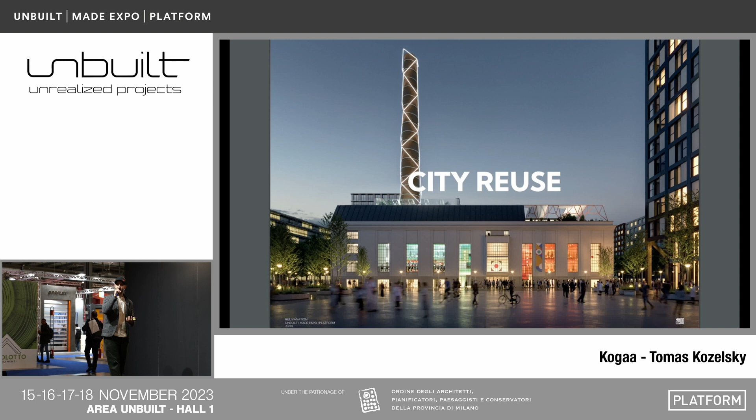Our main topic is city reuse. We started from adaptive reuse, taking worn out, hibernating old buildings and transforming them. But we grew bigger and bigger, and suddenly it's not just houses, it's the infrastructure, it's also pieces or quarters of the cities. We are basically expanding into the public space. So this is what we do.

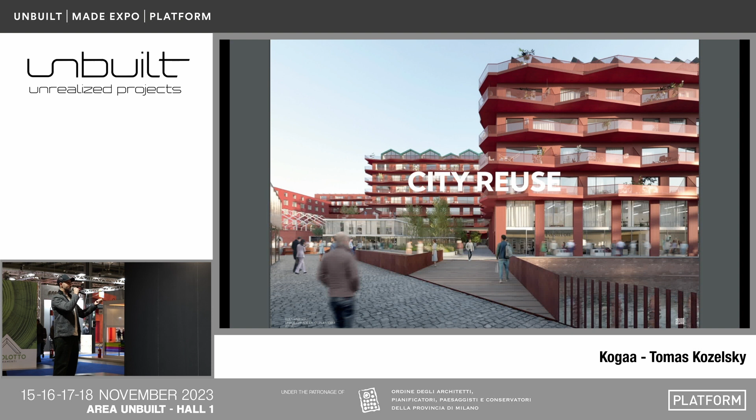Today I would like to tell you a little story about one building in Brno, the second biggest city in Czech Republic. It's a story about us finally growing into becoming a considered big architecture studio, because they allowed us to play with this proper historical heritage.

It's a building, a public spa by Bohuslav Fuchs, who was the biggest trailblazer of functionalism in Czech Republic. It all started in the 1920s, when there was a massive boom of the fashion industry in Brno. It was called the Moravian Manchester, or Central Europe's Manchester. There were plenty of companies producing textiles, and it was a period when a lot of people from villages started moving into the city.

For all these workers looking for work, they had to build houses. But at the time, the sewage system was not so developed. So all the houses built for these poor people moving into the city created a kind of micro-housing - basically classic houses with small apartments. The approach ran through a common balcony, shared with all the people living on the same floor. The only toilet they had was a shared one at the end of the balcony, and there were no showers, nothing like that.

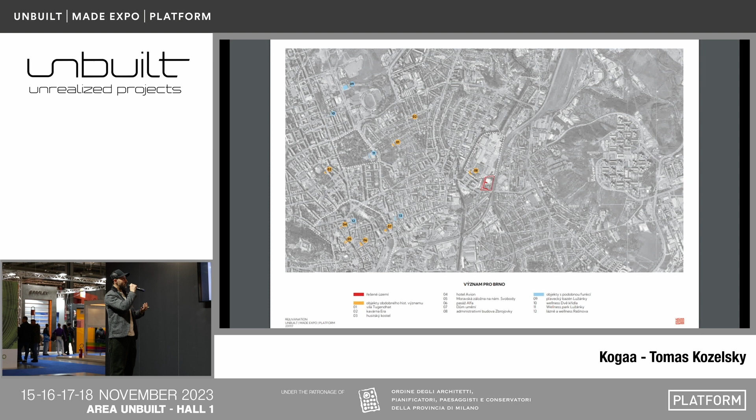The actual historical quality, something quite interesting about the spa, is the fact that it's a member of a streamline Art Deco style, even though it's functionalism.

Art Deco per se is about using curvatures, and it allows you to appear like a steamboat or a plane or something like that. But with functionalism, it's all about the right angles, and it's very difficult to create a volume or figure that gives you the feeling of a streamline.

Yet this building is the only nautical or streamline functionalist building that we have in the Czech Republic, so that puts a different level of heritage protection on it.

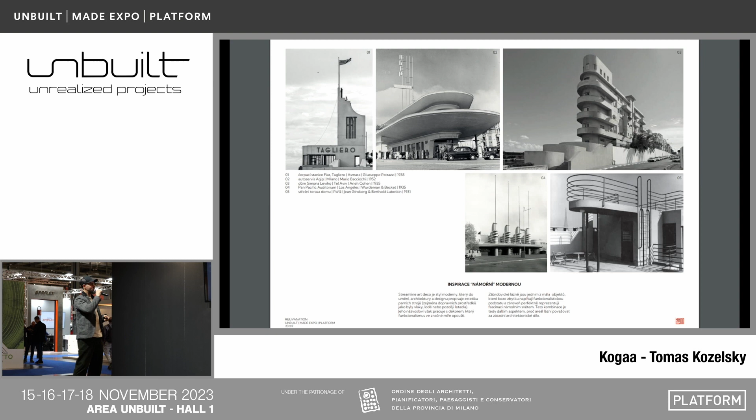But times are changing. This is how the building looked after the revolution. After the Second World War came the era of socialism, and the municipal spa turned into a social facility working for whatever was needed—there were parts used as hospitals. Every new user was kind of transforming it, so the first lobby you saw, nicely open with beautiful windows and greenery inside, turned into these kinds of hallways which give you creeps.

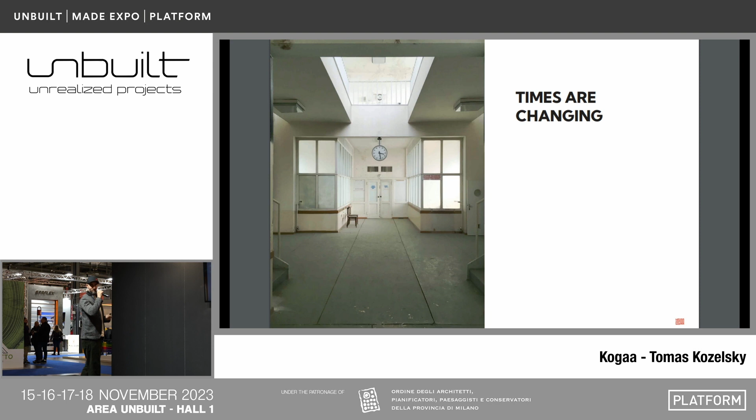This is always a comparison of the same areas, how it looks right now and how it looked in the original design. The original design was absolutely ingenious—it was a social building, representative, but still a social building.

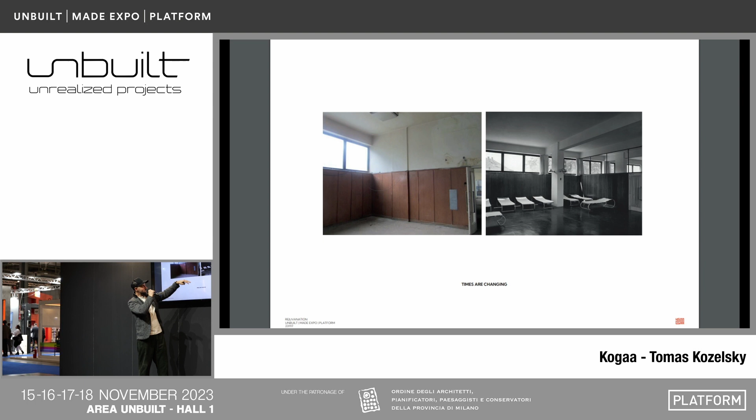What you can see is all these linear windows which are way too high to see outside, and partitions which also weren't reaching the ceilings. Why was that? Because at the time electrical installations were super expensive, and these were just for workers going to be washed there. So they used daylight to cover all the rooms inside, instead of separate ceilings they had one common ceiling.

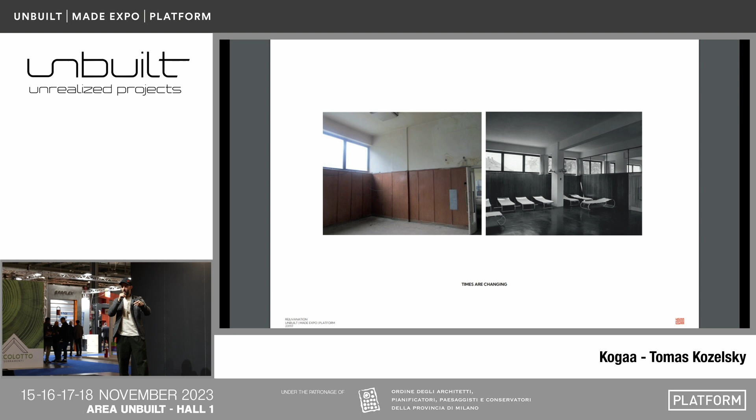At night they used a few spotlights shining into the ceiling, managing to light all these little rooms like the showers, so you didn't have to spend so much energy keeping the building running even at night. This is on the ground floor.

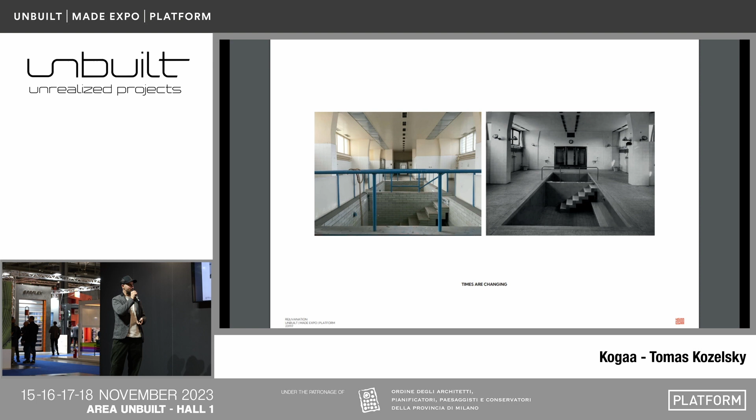We have these inbuilt pools which were used for massages. It seems like a small thing, but the fact that you have it on the ground floor, and heritage protection says you cannot do anything with these pools—they have to remain as they are—is a big issue for any possible usage of the building.

This is how you see advertising hit the main entrance towards the exterior pools. You don't see it much, but this beautiful glazing turned into very cheap glass bricks, which are now broken with dead pigeons lying inside—a very representative moment.

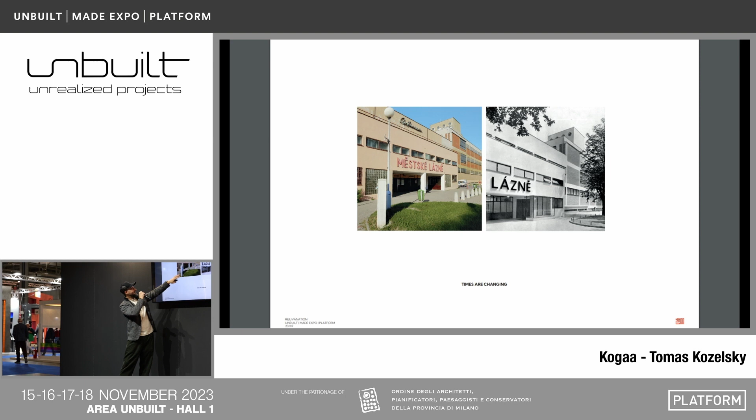Suddenly, from just a spa it became the city spa, and here you see it's decaying, and has been decaying for quite some time—this is the recent state. We were there not even a year ago, and as you can see, the ceilings are really falling apart, and the infrastructure is actually missing.

This is happening just because the owner is the city, and they're trying to change it. They've already had more than 20 projects for what to do with it, but every time a project lands on the table of heritage protection or monument care, they say no, we're not permitting it because you're destroying the building. So the building is actually decaying by itself.

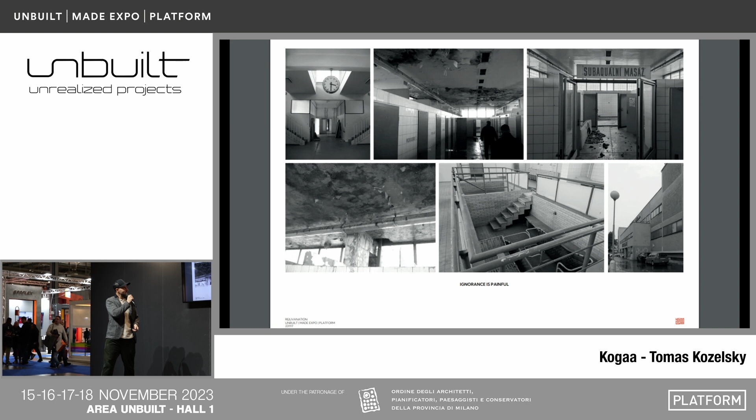So when we were addressed, we decided to have an approach that recovers the body of the building, but we realized the first thing we had to start with was recovering the soul—the original initial function of the building as it was.

So this is actually our proposal, which is basically the same thing as there was at the beginning. We did a stratigraphy check to find the original colors, because black and white photos only give you black and white, and we found there were much more colors inside the interior. So we started working on the rehabilitation of the building.

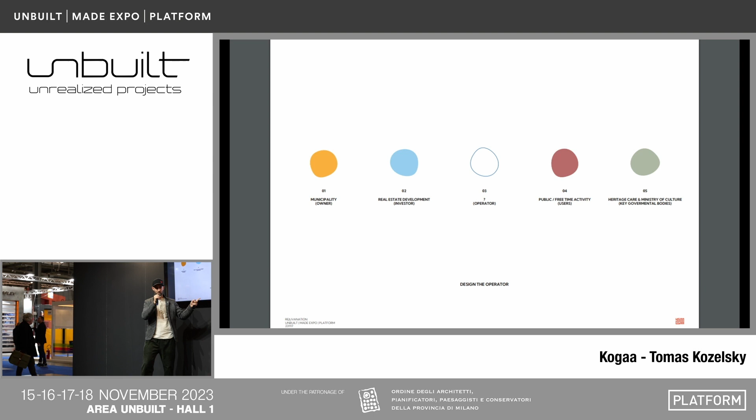What was really the essence of design in this project was the structure. We had the owner, which was a municipality, and we had an investor, the real estate developer, saying, guys, I cannot have this falling apart building right next to me. I'm willing to put as much money as you want into it to turn it into something, but I don't have, as a developer, the ability to run it. So you should look for some operator. That's the thing I cannot do.

Then we know from public opinion what people want the building to work as. They want to use it as a free time space. The city actually determined the plan of mobility within the city as this being a free time center, but actually it doesn't work at all.

And then we have the bad guys in brackets behind it, and that's the heritage care and heritage protection. We have two different departments: one is the big one, the country one, the Ministry of Culture, and the second one is the local one. So that was the situation we had, and everybody wanted something else.

The city, of course, focuses on the design of the city image. The investor wants to have a financial return through raising the exclusivity of the area. The public in general is focused on the extension of city amenities, and the monument restoration department is focused on monument restoration and cultural gains.

So these were all the things we had to put on the head of the operator, and we started traveling the city and the country, and in the end we actually managed to attract a chain which does good wellness. They were like, hey, the area is pretty good, we don't know if we fit inside the building. And there start the negotiations on the rent, on the conditions, on the support, if everybody is willing to contemplate having a spa there.

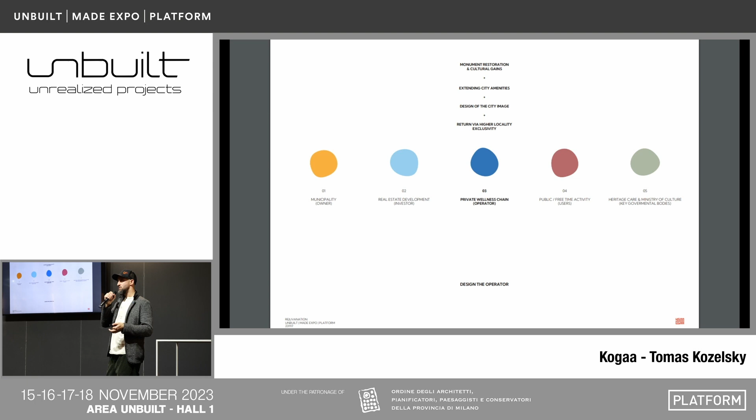In the end, we actually managed to bring all five actors together and present the project. So how we actually managed to convince the most important part, the heritage protection, was...

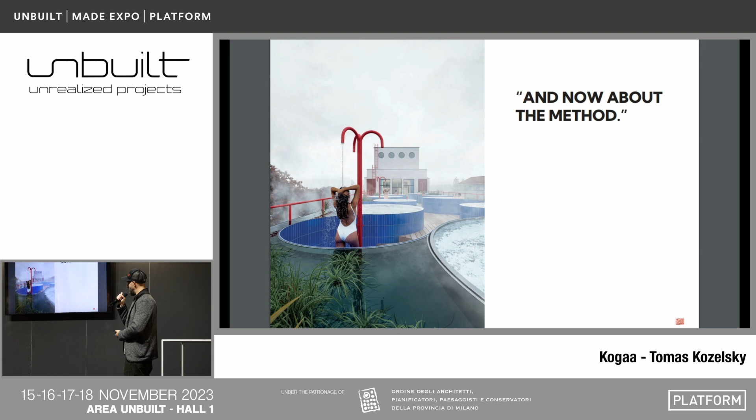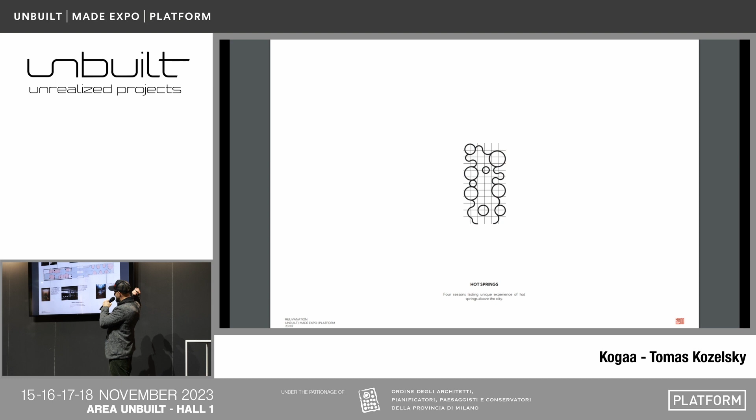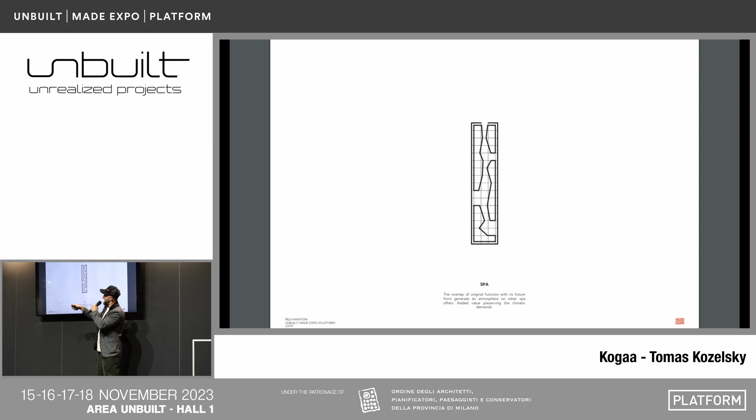This is the idea, how we're keeping the original facade, and we are putting in the inbuilts. Here was the idea of having the back part of the spa with the greenery. We also checked if the saunas would harm the plants behind, and questioned maintenance—like if we'd need a watering system, and whether a leak would damage the rest of the facilities.

So that was the first step, and there was the moment when the heritage protection said, okay, that's a way to go. This is the ground floor.

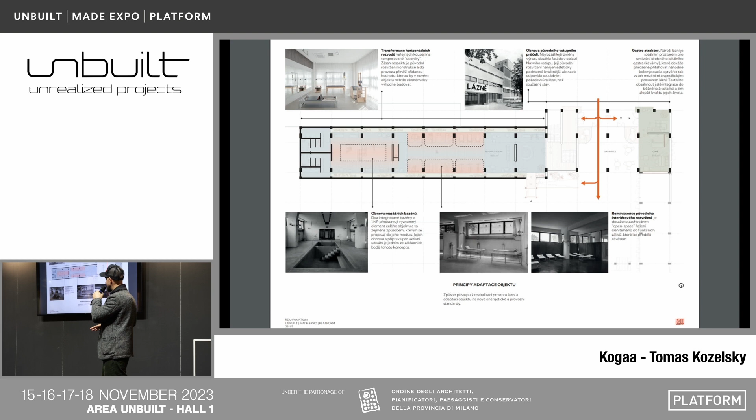This is a moment where you see the original images of the physiotherapy. That's exactly what we kept. We put the tables and massage tables back in the same positions, and we managed to preserve and hold the pool, which I already showed you.

Then we tried to bring something new, because the wellness guys we worked with are very focused on exterior activities—you don't want to enjoy the spa only on the inside. When you have views around, it adds something extra. So they asked us about making exterior spas and jacuzzis, and we focused on natural elements like tiny natural pools, which are always related together.

We tried to represent them on the roof. We had to follow the high levels of the roof, which was the handrail—the attic of the roof. So that was, for us, the height limit.

The red elements of the showers are based on elements you can find on the historical ladders which connected the roofs. We questioned if having a woman there is politically correct, but we couldn't find a picture of a guy showering that didn't look like he's stripping, so in the end she won.

The last part was basically trying to activate a dead sunbathing roof, which isn't in good shape anymore. As you notice, all these functionalist metal elements, all these handrails were represented in this kind of red tube. So we turned the roof into an activity roof using that red tube.

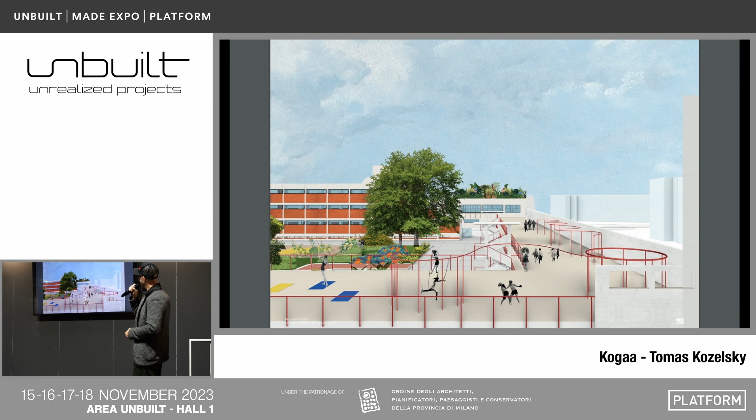We put some climbing elements there, a little playground for kids, and made a yoga deck. With all of this approach, we got agreement of all the parties, which is super cool—they said, hey, you know what, we got it. The Heritage Protection said if it's done this way, it's super cool, so we love it.

But the problem is agreement is not money. So we have the agreement so far, but there was inflation, there was COVID, all the story that's happening right now. Now we're just waiting for the moment when the developer says, hey, we're back on track, we're selling the flats the way we wanted, so now we're ready to invest into it. But it might also never happen, so that's why we're showing this as an unbuilt project.

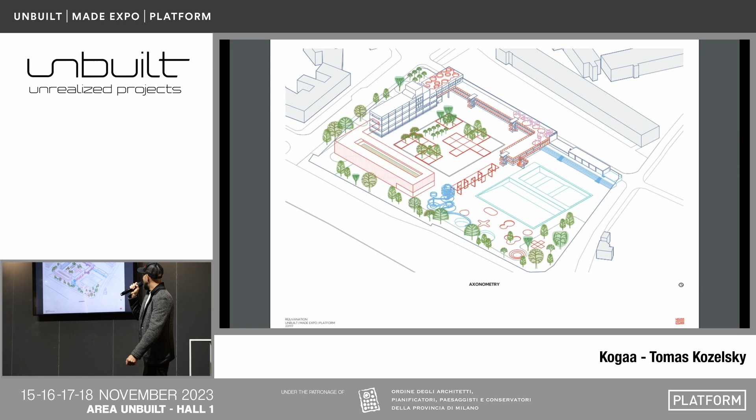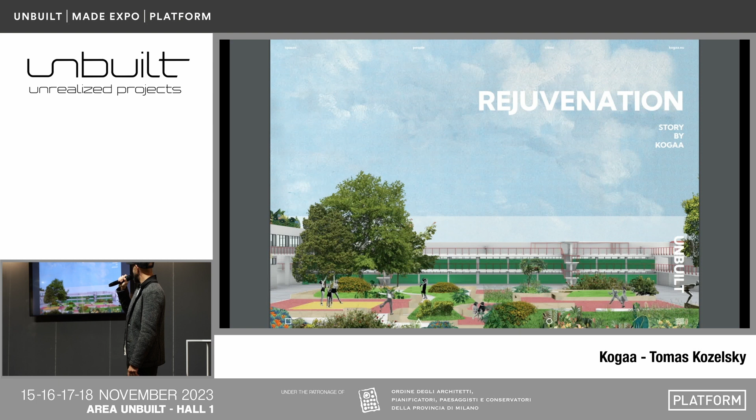And here you see all these kinds of small interventions we did in the area. I didn't show all of them because it's longer than 20 minutes. And that's it—that's all about this little project of ours. Thank you for the focus.